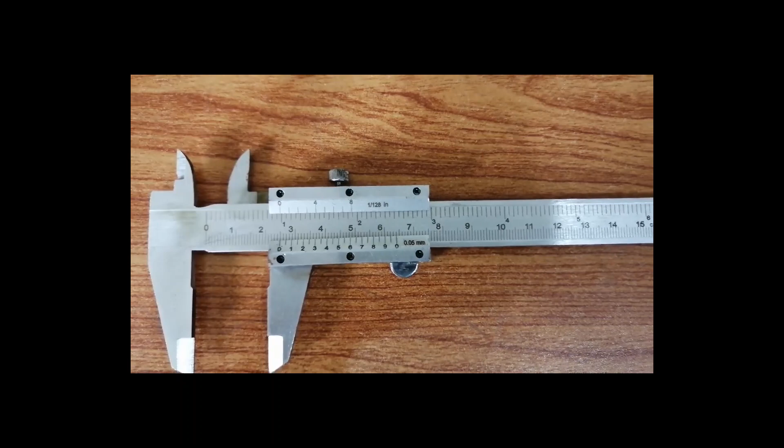First of all, you have to identify whether your vernier caliper will measure reading in centimeters or in millimeters. The best way to do this is to see the main scale right at the end. If there is 'centimeter' written here, this means this vernier caliper will measure the reading in centimeters. If it's written 'millimeter', this means this vernier caliper can measure length or diameter of anything in millimeters.

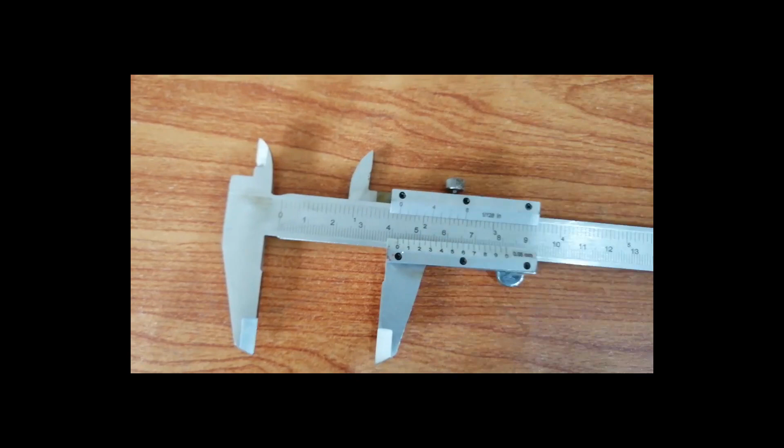There are a number of parts of this vernier caliper. This scale here is called the main scale. This scale here is the vernier scale, and there is written here 0.05 millimeter. This 0.05 millimeter is its least count. It's the smallest measurement that this vernier caliper can do.

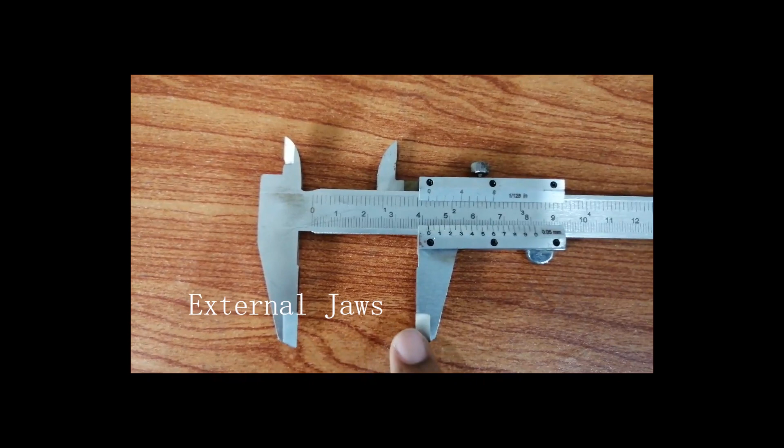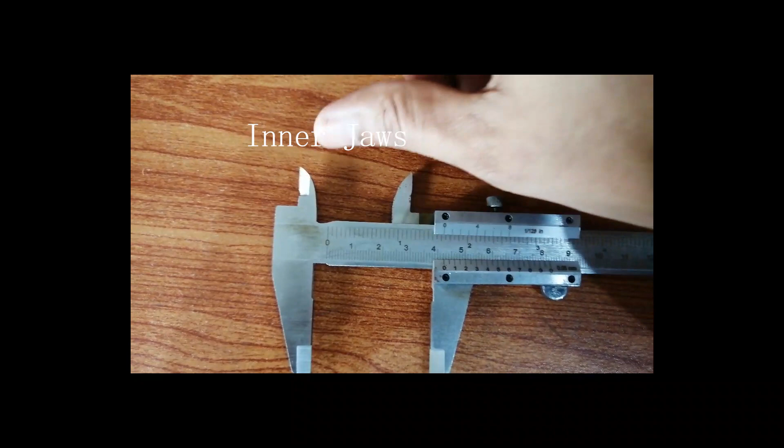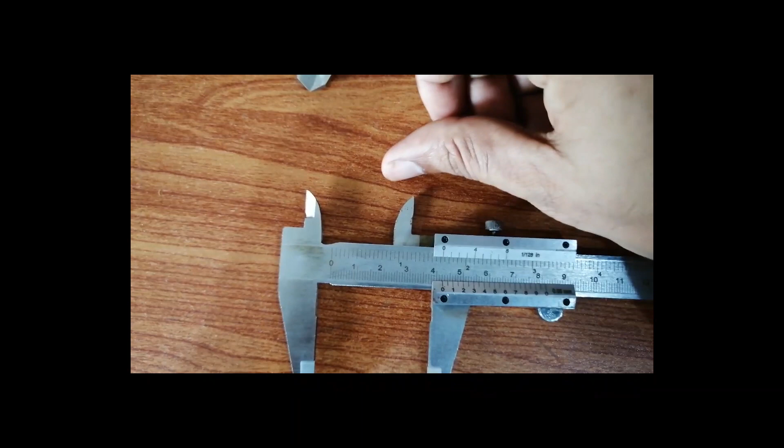Then it has two jaws. These are called the outer jaws. If you want to measure the length or diameter of something, you have to place that thing between these two jaws. These jaws are called the inner jaws. If you want to measure the inner diameter of something, you will be using these two jaws. Let's suppose if you want to measure the inner diameter of a test tube or a measuring cylinder, then you will be using these two jaws.

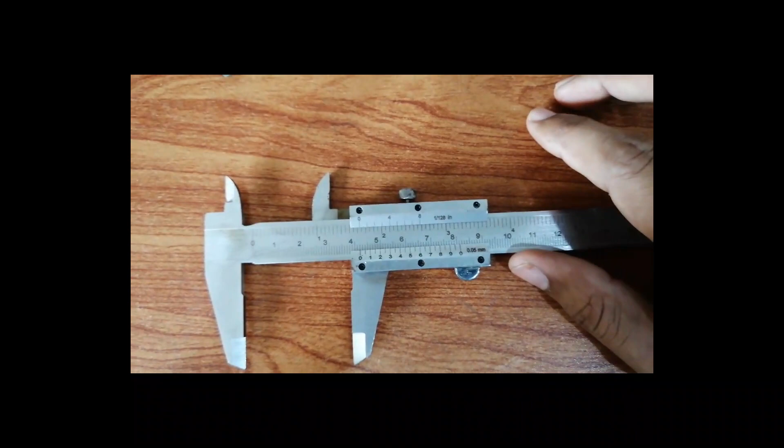Then there is a screw here as well. This screw is called your lock screw. If this is tightened up, then your vernier caliper will not be able to move, and you can record your reading afterwards as well, and it will be locked at its place. The same thing happens with a millimeter vernier caliper.

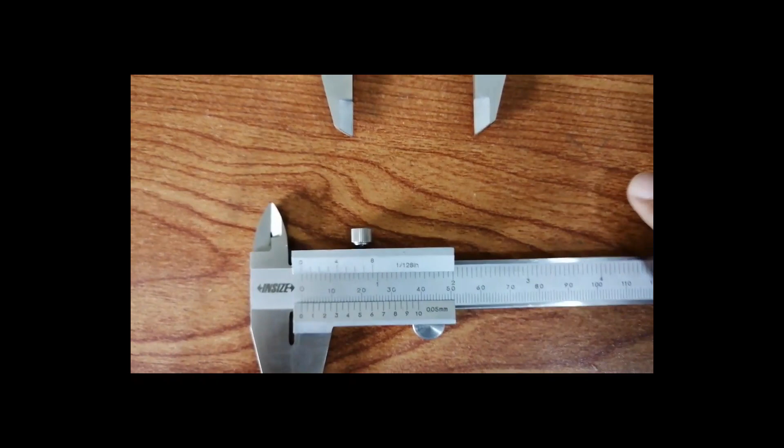You can see the difference between these two vernier calipers: in this vernier caliper the readings are 0, 1, 2, 3, 4 and so on. So in between 0 and 1 there are 10 small lines. Each of these lines represents 0.1 centimeter. So if there is one line up in front of one, that can be written as 1.1 centimeters.

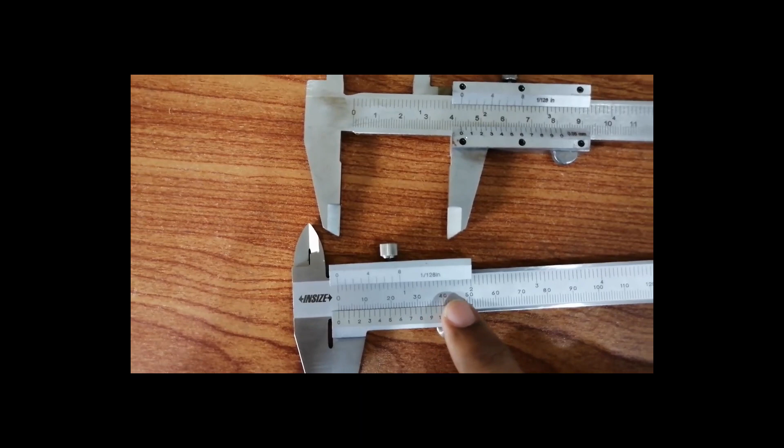Whereas in this vernier caliper, you can see the readings are mentioned as 0, 10, 20, 30, 40 and so on. So if you are noting down the main scale reading from this scale, those main scale readings will be in whole numbers. They can never be in decimal points. Whereas in the other situation, the whole numbers can be in decimal points as well.

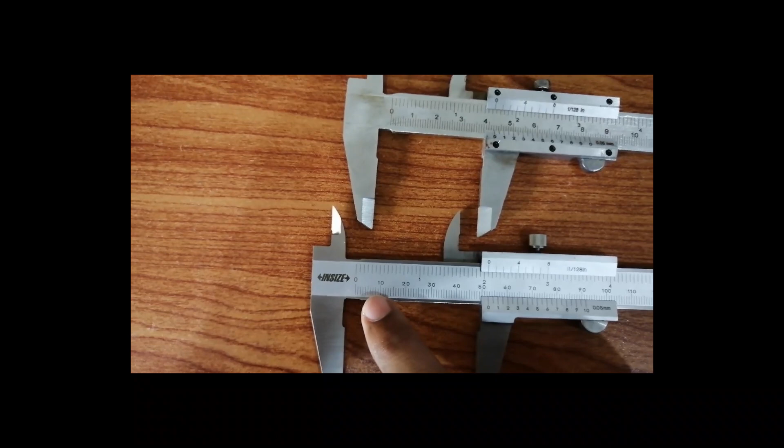You can easily see that if its scale is like this, then if it's 10, the reading next to 10 should be 11. It should not be 10.1 and so on. So you have to be very careful whenever you are noting down the readings using this vernier caliper.

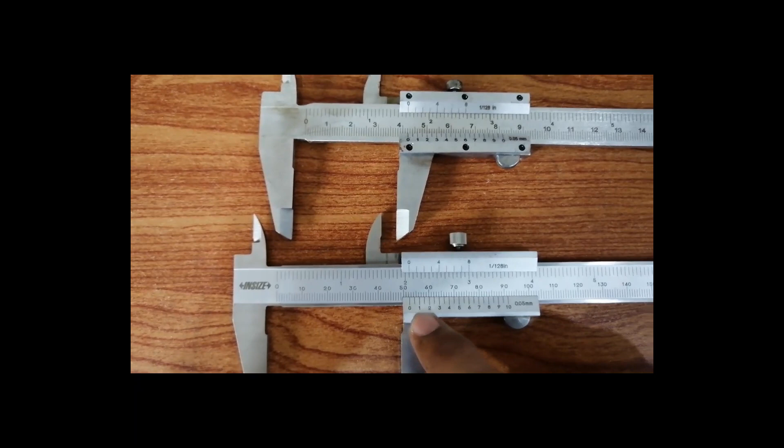It also has its least count mentioned here, also 0.05 millimeter, and you can see that there are 20 lines, represented by 0, 1, 2, 3, 4. This is basically your vernier scale.

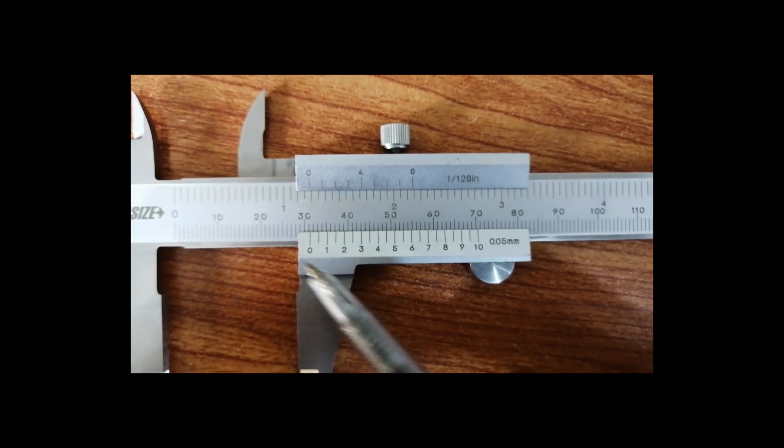In order to measure the length or diameter of something, you have to first note down the main scale reading. You have to see that the 0 of the vernier scale is in between which two readings, and note down the smaller reading. As I can see, this 0 is between 31 and 32, so you will note down the main scale reading which should be 31 millimeters.

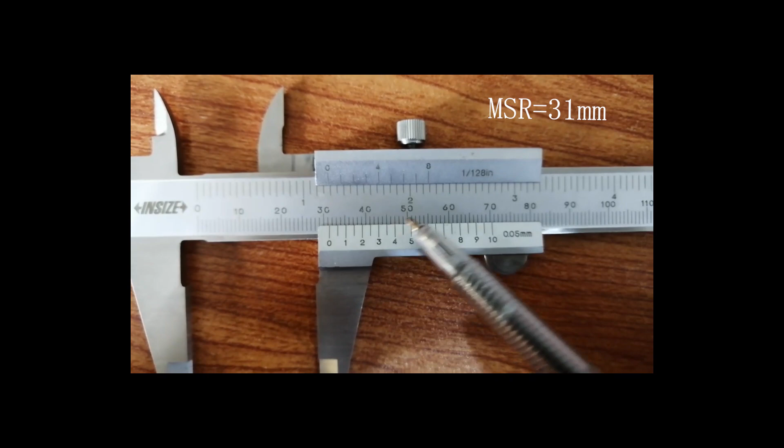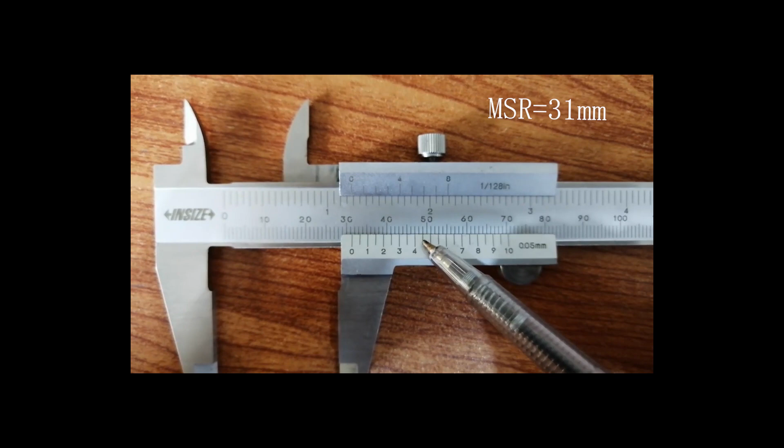Then you have to see which line of the vernier scale is coinciding with any line on the main scale. I can see here that this 4 line is coinciding with this line. It's the best match. You can have any other reading as well which is matching the best, but these won't affect your result so much. So I will be taking this reading 4 as my vernier scale reading.

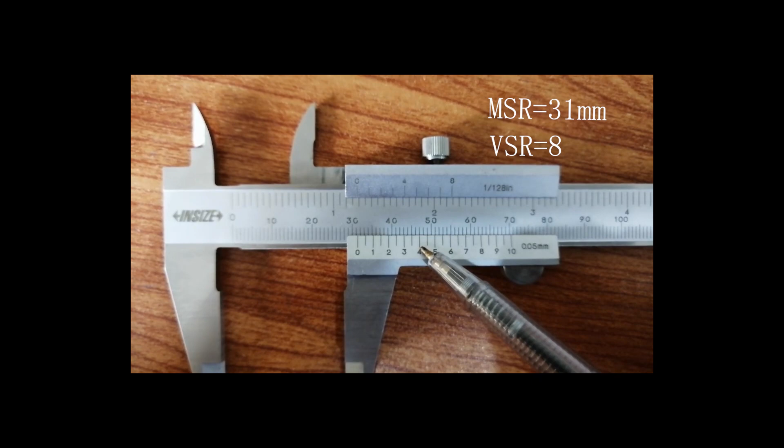After noting down the vernier scale reading, you don't just take this 4, you have to count which of these lines is 4. So basically you can see that this is your 8th line - 0, 1, 2, 3, 4, 5, 6, 7 and 8.

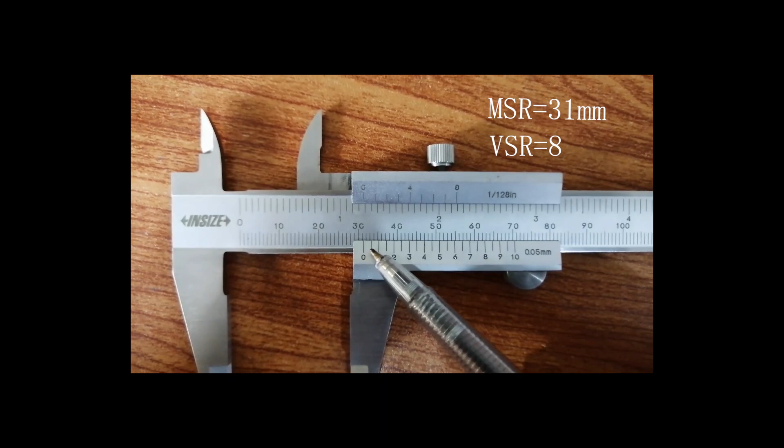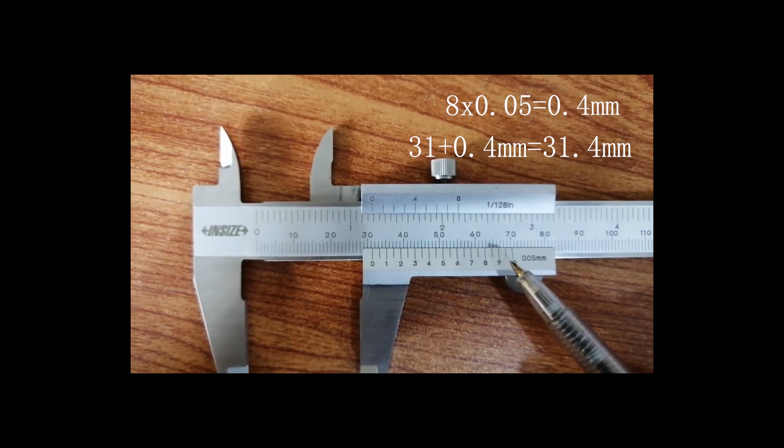This 8th line is coinciding with a line of the main scale. So you have to multiply this 8 with 0.05, which will give you a number. You will add that number to the main scale reading you obtained earlier. That will give you the final reading of this vernier caliper.

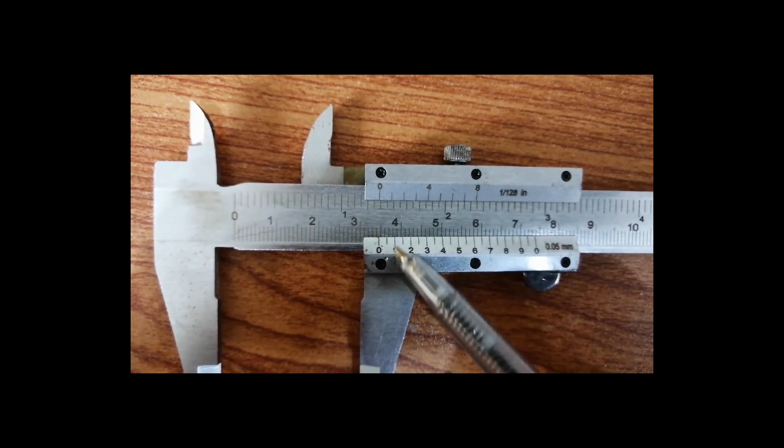This is another vernier caliper. This vernier caliper has the main scale in centimeters, so you will note down the reading in the same usual way. First you have to see that the zero of the vernier scale is in between which two readings. You can easily see that this zero is between 3.4 and 3.5. So you will note down the smaller reading, 3.4 centimeter, as your main scale reading.

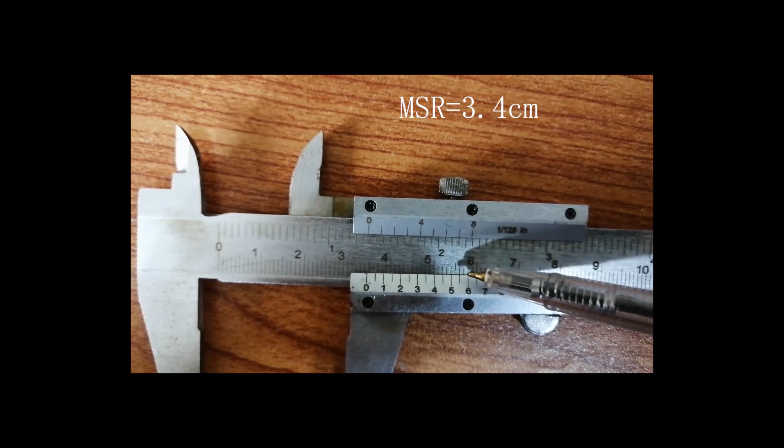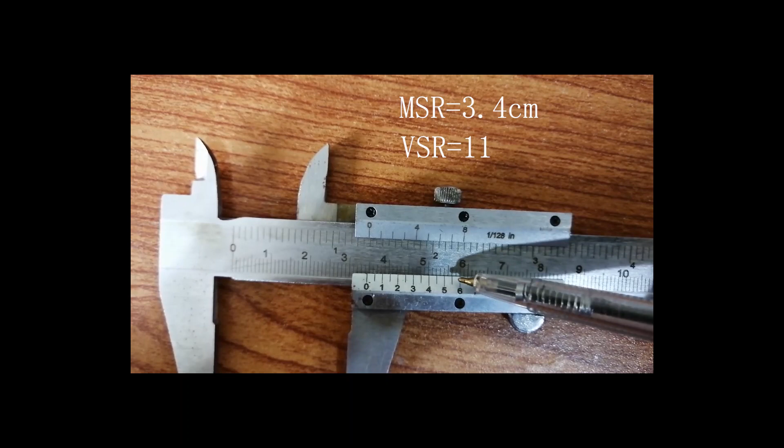Then you have to see which line is coinciding with any line on the main scale. Carefully watching, I can easily see that this line is coinciding with this line on the main scale, or you can take this other line as well. It doesn't matter, because a one line difference will not hinder your answer a lot. So I will be taking this line.

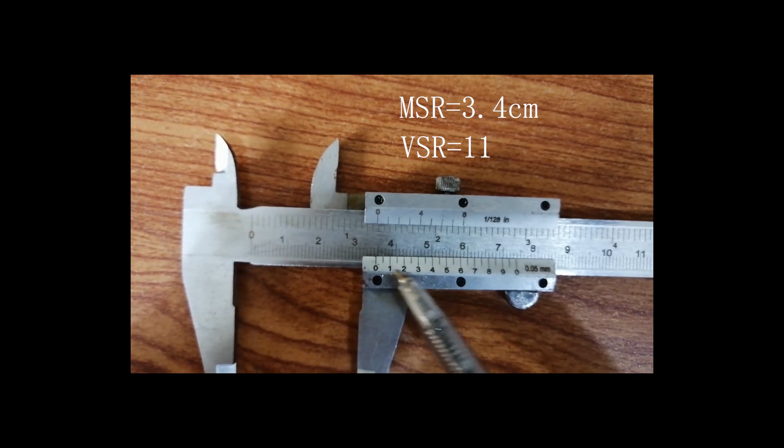You have to count from here which number this matching line represents. As I can see, this is line 0, 1, 2, 3, 4, 5, 6, 7, 8, 9, 10 and 11. So the 11th line is coinciding with this line on the main scale.

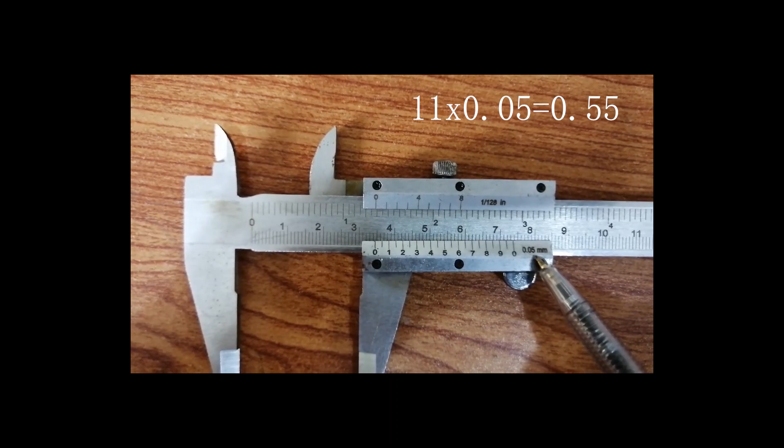You will multiply this 11 with the least count, 0.05 millimeter mentioned here. Whatever reading you get, you will add that reading to the main scale reading you noted down earlier, which is 3.4 centimeter. This will give you the final reading of the vernier caliper.